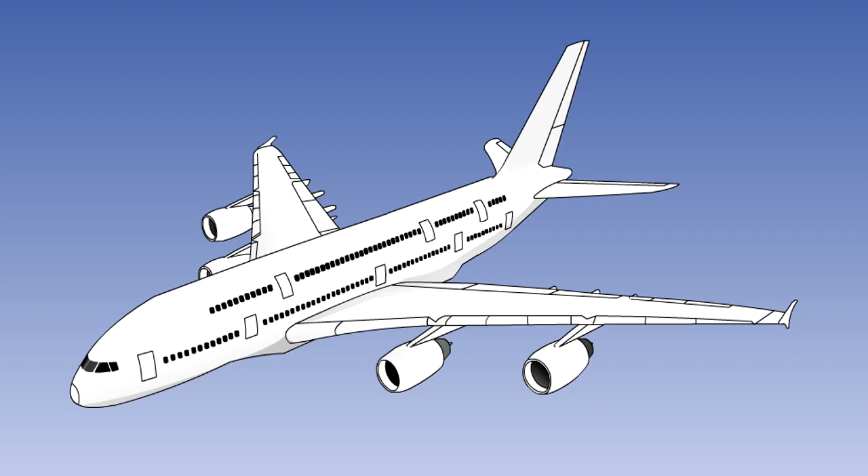Mechanical and hydromechanical flight control systems are heavy and require careful routing of flight control cables through the aircraft, using a system of pulleys and cranks. They also require a lot of maintenance in the form of lubrication, tension adjustments, and so forth. These systems have a very limited ability to prevent dangerous characteristics such as stalling or spinning.

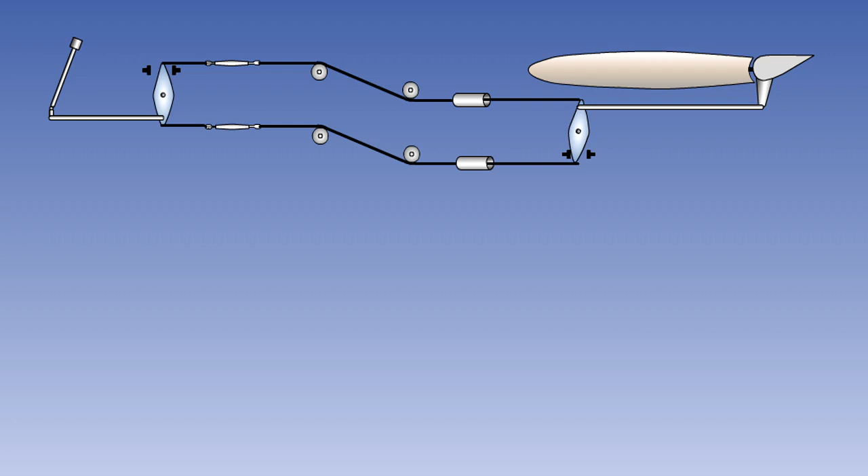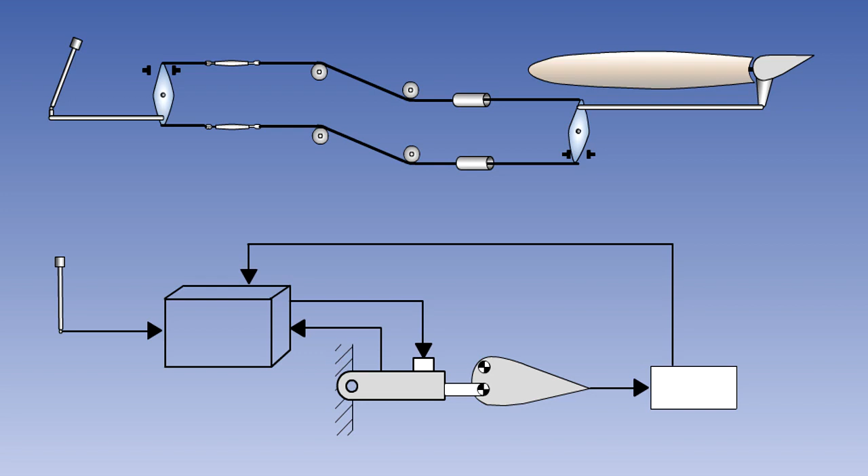Electronically controlled flight controls in systems known as fly-by-wire systems overcome many of these problems. By using electrical control circuits combined with computers, designers can save weight, improve reliability, and use the computers to prevent undesirable aerodynamic characteristics.

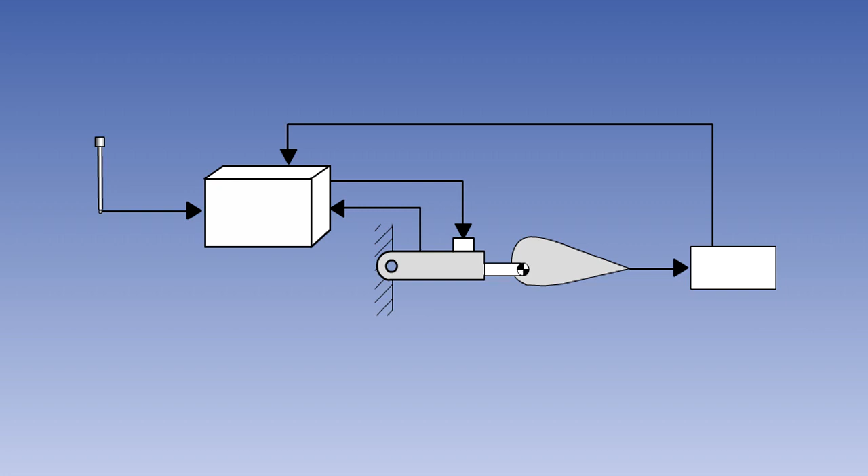Between the pilot and the final control actuator, a computer system is interposed. This modifies the pilot's inputs in accordance with carefully developed and validated software programs in order to produce maximum operational effect without compromising safety.

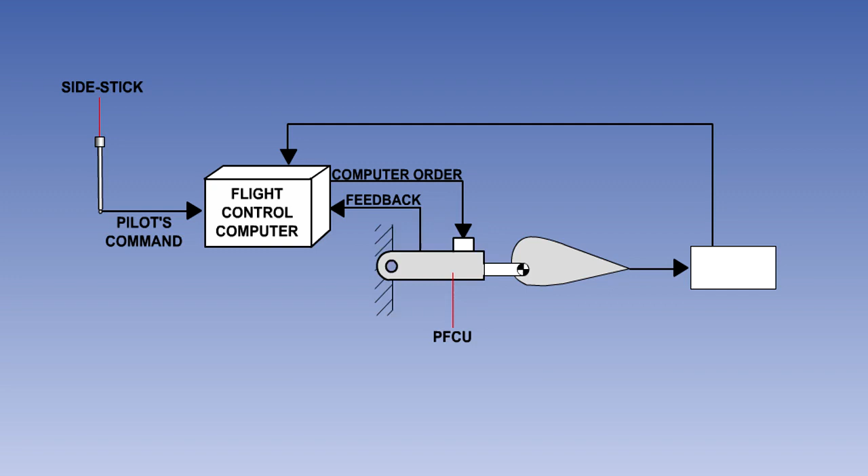The pilot's commands are converted to electronic signals. These signals are passed to the flight control computers, which determine how best to move the actuators at each control surface to provide the desired response. The actuators are still usually hydraulically operated. The computer monitors the aircraft's response to the flight control movement and modifies its output to the powered flight control unit as required.

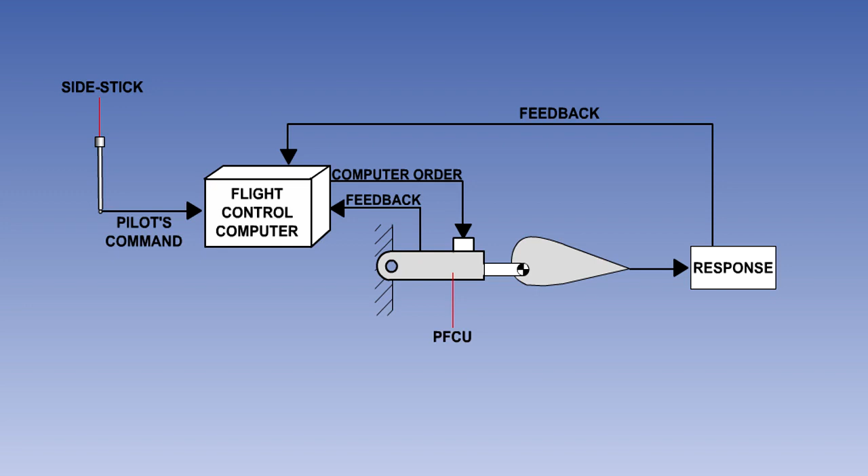All Airbus aircraft since the A320 series have used fly-by-wire controls. Boeing have followed with their 777 and later designs.

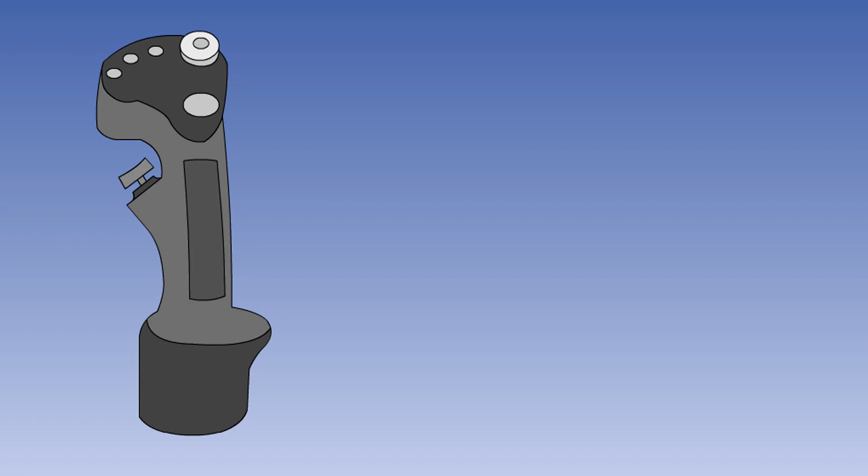Side sticks, or conventional control yokes or wheels, are used in fly-by-wire aircraft. The side stick offers the advantages of being lighter, mechanically simpler, and unobtrusive. Standard rudder pedals are used.

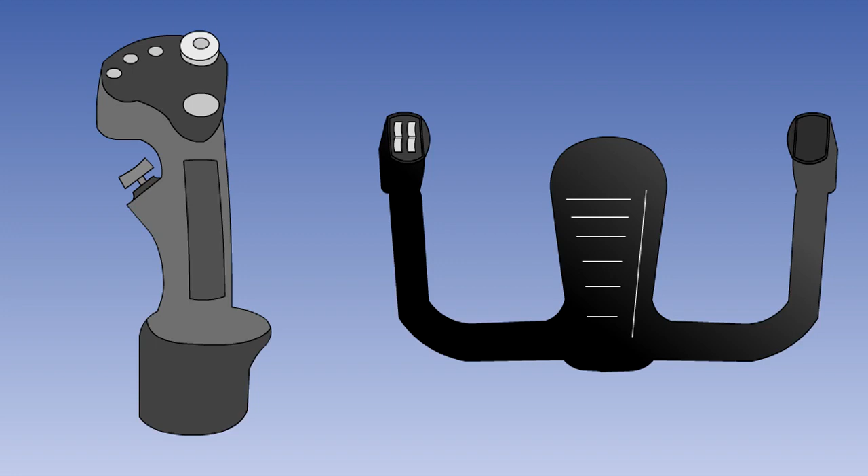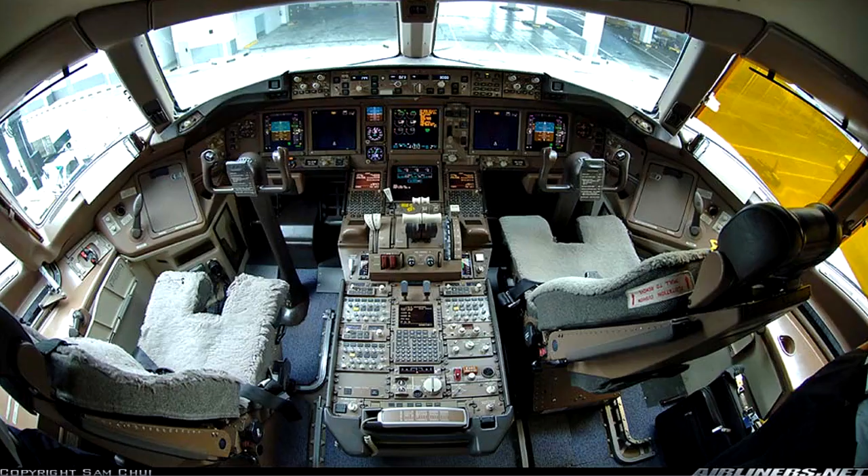Boeing consider the lack of visual feedback from the side stick a problem, and so use conventional yokes in their fly-by-wire designs. The Airbus series have used side sticks extensively, and the new Airbus A380 uses them.

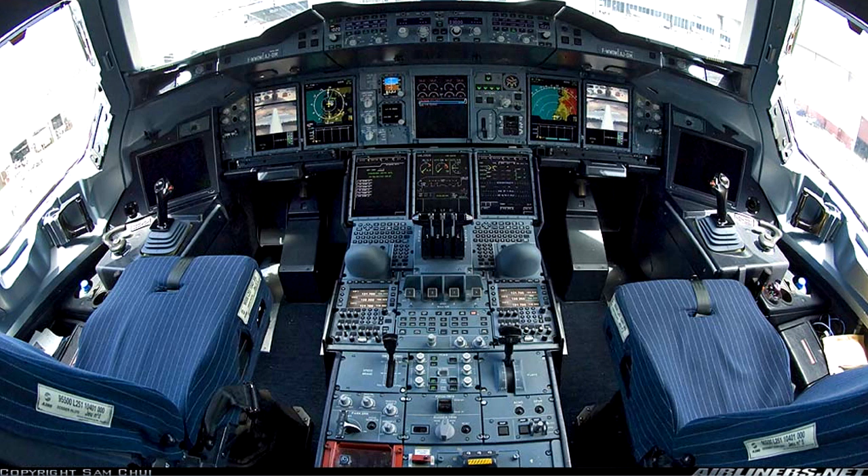The main concern with fly-by-wire systems is reliability. While traditional mechanical or hydraulic control systems usually fail gradually, the loss of a flight control computer could immediately render the aircraft uncontrollable. For this reason, fly-by-wire systems incorporate either multiple redundant computers, some kind of mechanical or hydraulic backup, or a combination of both.

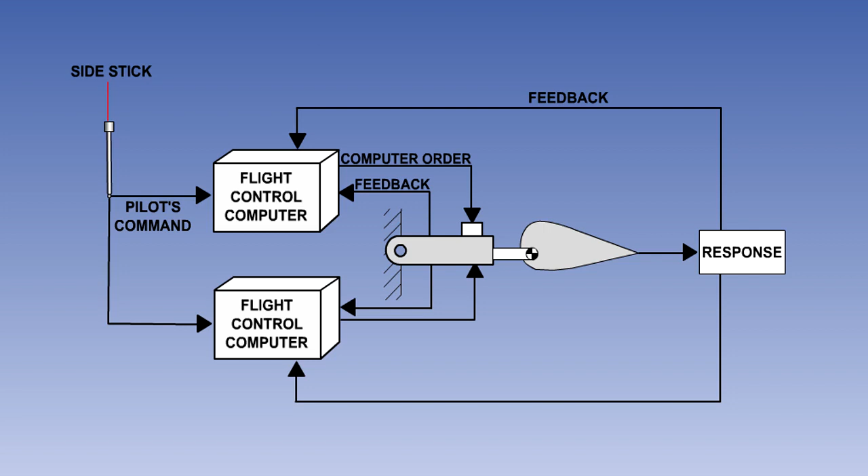The Airbus A320 fly-by-wire system is a fairly typical system, so we will now take a look at its features. There are 7 computers and 3 hydraulic systems looking after the primary flight controls. Each primary flight control has 2 hydraulic actuators, each fed from one of 3 independent hydraulic systems.

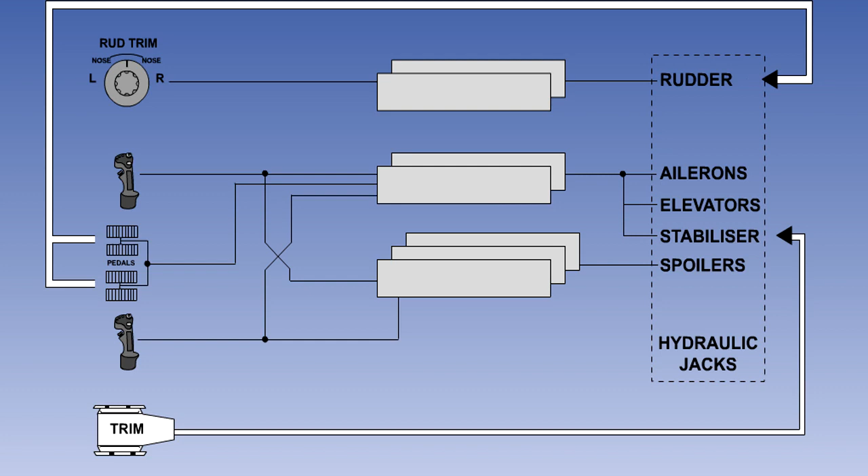There are 2 elevator aileron computers, or ELACs. These control the elevators, ailerons, and stabilizer. Only one of these computers is controlling at any time. The other is a backup and will automatically take over in the case of a failure.

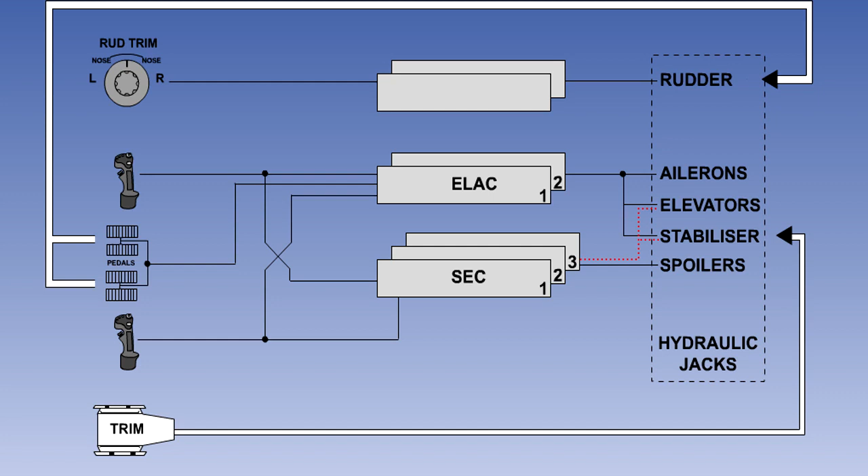There are 3 spoiler elevator computers, SECs. They control the spoilers. And in the event of failure of both elevator aileron computers, they will also control the elevators and stabilizer.

Although the pilot controls the rudder through a conventional hydromechanical system, there are also 2 flight augmentation computers, FACs, which operate the rudder to automatically give yaw damping.

The stabilizer trim is hydraulically operated. It can be mechanically controlled by the pilot's trim control wheel. This system has both electrical and hydraulic redundancy built into it.

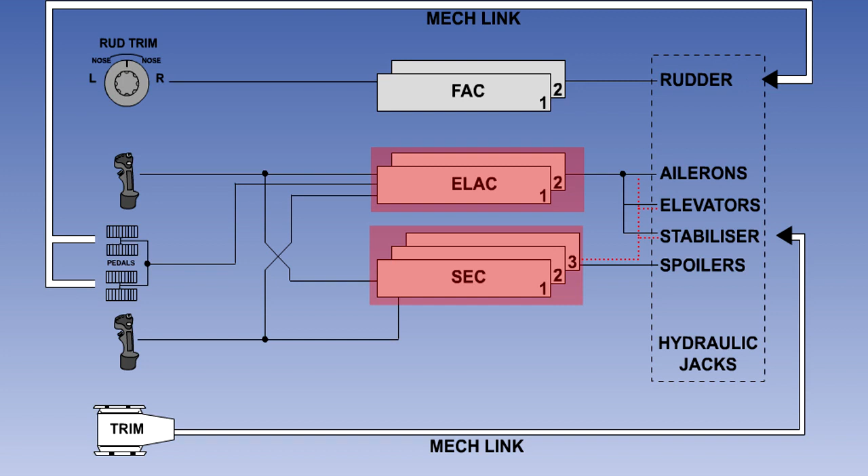The elevator and ailerons have access to up to 5 computers, only one of which is needed for them to operate. The aircraft has 3 hydraulic systems. Each control surface can be operated by either one or 2 of these systems. Even if 2 of the hydraulic systems fail, the aircraft will still be controllable.

In the event of a total electrical failure, the aircraft can be controlled longitudinally with the trim wheel and laterally with the rudder pedals, both of which operate their control surfaces hydromechanically.

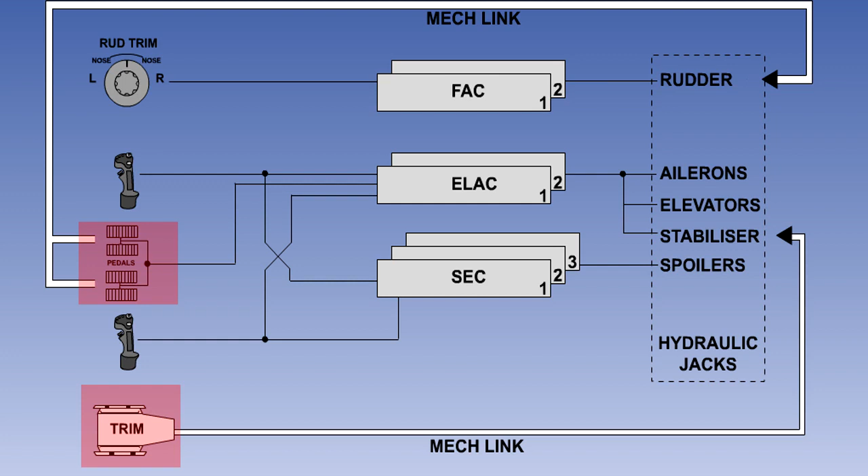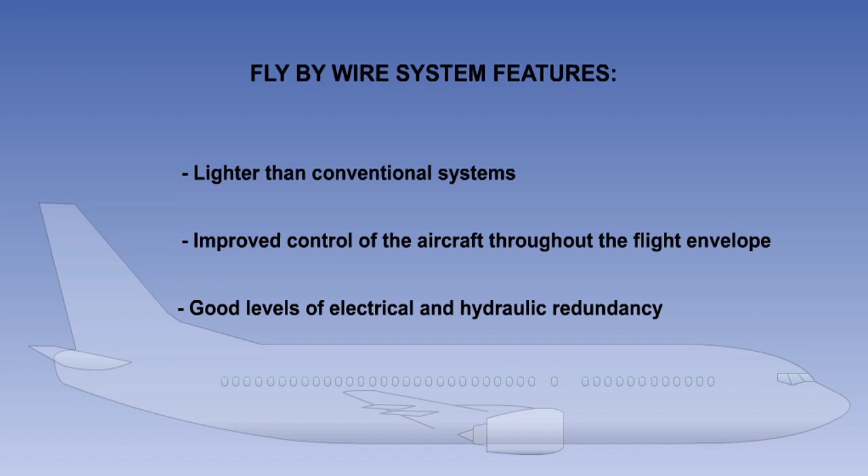To summarize fly-by-wire systems: they are lighter than conventional systems, and they improve the control of the aircraft throughout the flight envelope. As with conventional systems, they have a great deal of redundancy built into them.